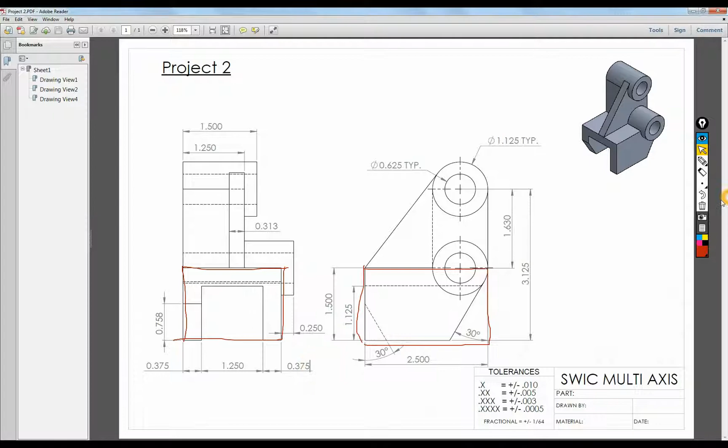We're going to go ahead and start drawing the top of this part, and the first feature I'm drawing is this guy right here. He's kind of the main feature of this whole part. Okay, so that is 2.5 inches long, and you add all three of these up, it's 2 inches wide. So let's go ahead and move over to MasterCAM and get drawing.

So start with a rectangular shape. It was 2 inches long. I'm sorry, that was 2.5 inches long. And it was 2 inches wide. And that was 1.25 plus 0.375, and there were two of them. So we'll let it do the math, and yes, it is. It's 2 inches. So I'm going to do an upper left anchor. I'm going to anchor it to the origin. Go ahead and approve that.

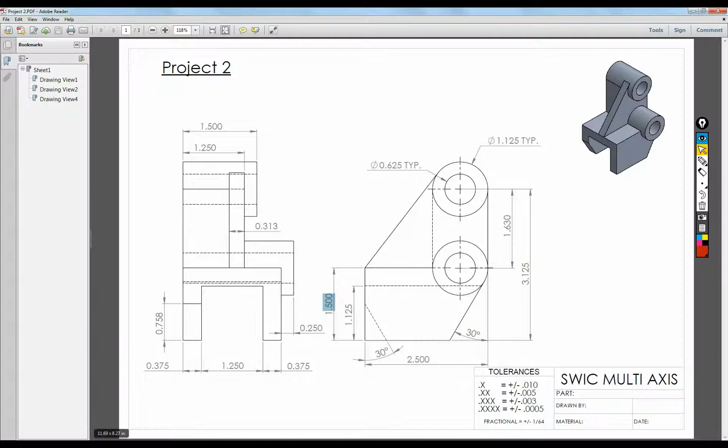So now I'm going to give myself a little perspective on this, and we're going to extrude this guy down. How far? That is this value right here, 1.5 inches. So we'll go solids, extrude, select that chain, approve it. Distance of 1.5. Let's extrude in the up position. Sometimes down's a little easier, but it really doesn't matter. Oh, there we go. So we have our first solid now, and it's just this block.

So the next feature I'm looking at making is this cut that goes straight through the part. It's this rectangular square, and it comes all the way through. The size of that is 1.25, and the height is 1.125. But we got to make sure we're drawing on this face. In order to draw on this face, we need to move to the WCS left.

Okay. Now I want to give you a little bit of heads up. What's the difference between these WCSs and these WCSs up here? These red ones have to do with how you're looking at the part. So when I click on left WCS, I'm looking at the left side of the part. When I'm looking at front WCS, I'm looking at the front side of the part. These up here, these greens, treat them as though you're looking at the machine, or a 3-axis mill. So when I click top WCS, I'm actually looking through the spindle. When I click front WCS, I'm looking through the front door.

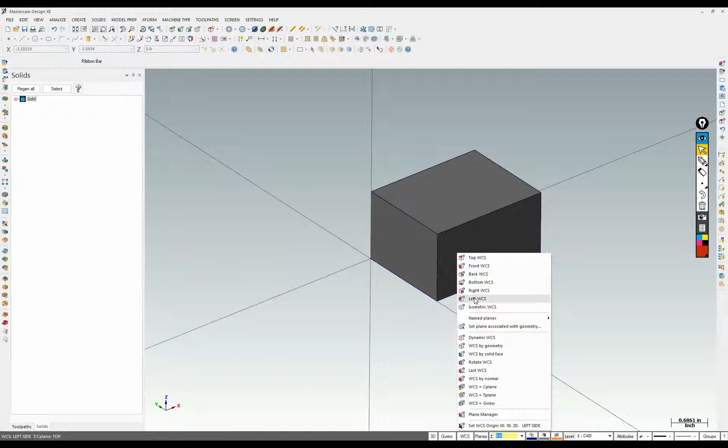So if I click left WCS over here on the part, that left WCS is going to be pointing towards the spindle. If I click bottom WCS, it means the bottom is now pointing towards the spindle. And this basically just changes the view. So in this case I click left WCS, that means this in essence is kind of pointing towards the spindle, and I'm just trying to give you an idea of how it's thinking about it. So when I click top WCS, as though I'm looking down through the spindle, I should be looking straight at that face.

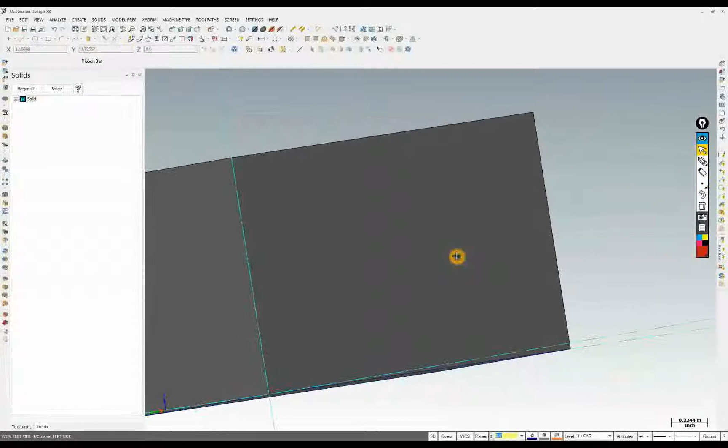Okay, so these can get very confusing sometimes, and I'm just trying to give you an idea of kind of what they're doing. In reality, that's not what's happening. It's not really setting up your machine for machining. So it doesn't relate to the actual CAM side of it. It's just sometimes how you're looking at it.

Okay, so we need to draw this rectangle here on this face, and I'm going to have some overlapping CAD here on this bottom. I don't like overlapping CAD. I'm going to create a new layer, and I'm going to call this center cut, and a new rectangular shape. The origin will be in the middle bottom, because I'm going to be snapping to that point right there.

Let's go back and get the dimensions again. It's 1 1/4 and 1.125. So it's 1.25 here, 1.125 here, center snap. Make sure these are all zeroed out.

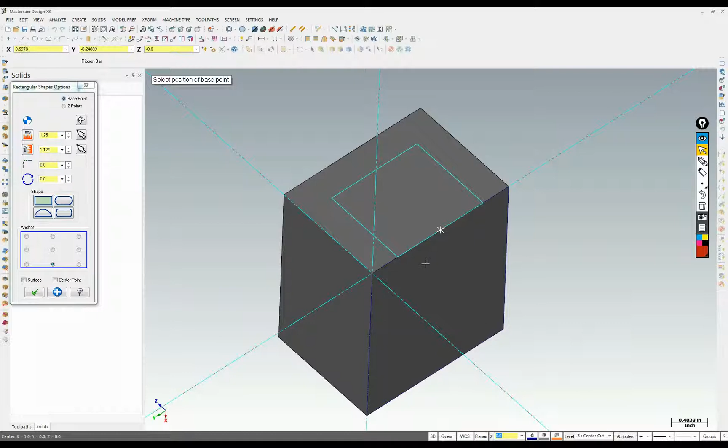We'll snap to this point here, and there we go. Now, because I created level 3, I can now turn level 1 off. Let's go and approve that here. Oh, that's okay. I've got myself in a little bit of an issue, but it's real easy to fix.

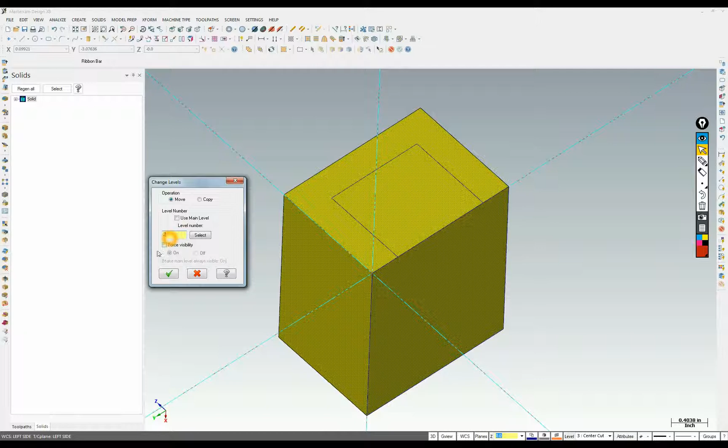Level 2 has nothing in it. Level 1 has the 4 original CAD lines and the solid in it. I want to move that solid to level 2 where it's supposed to be. So let's highlight that solid. Right click on the word level here, we'll uncheck use main level, and we will put number 2 here, and we'll approve it. Now you see you have 1 entity there, 4 entities here, and 4 entities here.

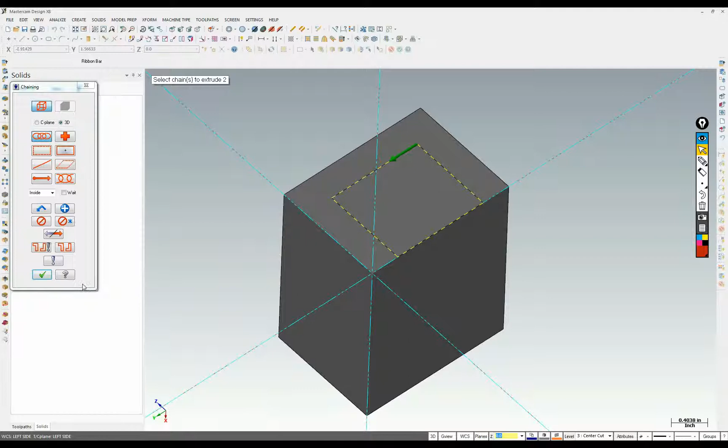So when I turn the visibility of level 1 off, just that bottom CAD. Now it's important, you don't want to delete the CAD you're using to create these solids. It messes things up. So let's go ahead and cut this CAD straight through it. So solid extrude, let that auto chain around. It's wanting to create a body initially. We want to do a cut body.

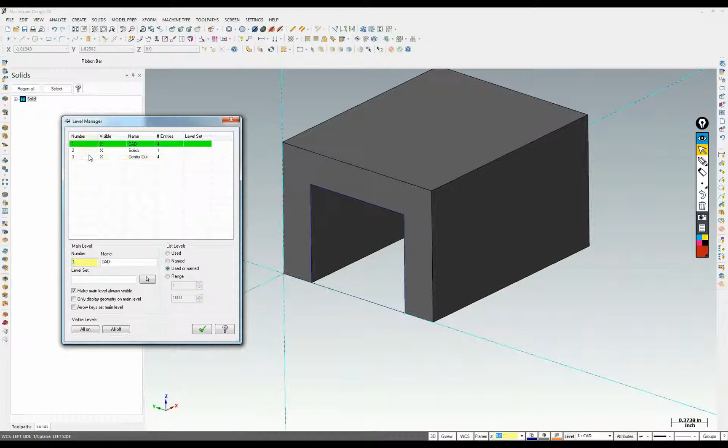We want to flip its direction because it's not actually cutting into the part. There, now it is. And instead of a distance, we want to go through all. And we'll approve that. And now you can see we got our bottom feature. So let's go back to our levels. I like to primarily draw on level 1. We'll hide the visibility of level 3.

So next part we're going to be looking at is this monolithic top, or it's basically a cube. It intersects these 2 cylinders here, and we're going to be drawing it from the top. So we're going to draw a square on the top face here and extrude it straight up. So we need to be drawing on this face. So in order to look down on that part, we need WCS top. And now we're looking straight down. To verify, I'll click this first one here. And there you go. We are looking straight down on this part.

Now, I'm going to teach you a quick lesson about 3-dimensional drawing and 2-dimensional drawing. With this in 3D, I can actually use my snaps to snap the square up here. What the 3D icon does here is it allows a Z value to be added into a snap. Let me show you real quick. So if I leave that in 2D and I want to draw a circle and I want to snap to this, what will happen is you'll see it actually get drawn down at 0, because Z of 0, 2-dimensional, even though I'm snapping to here. See, the circle's down there.

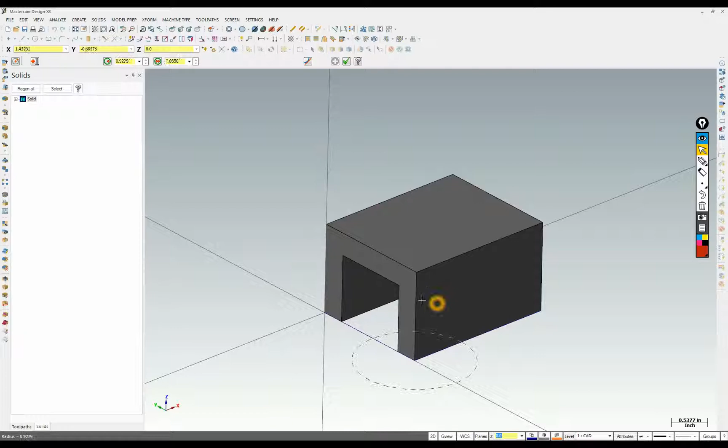Now if I really wanted to draw up here, I have 2 ways of doing it. If I have a place to snap to, I can adjust it to 3-dimensional, and I draw the circle again, and you see it now takes into consideration the Z depth here of a snap.

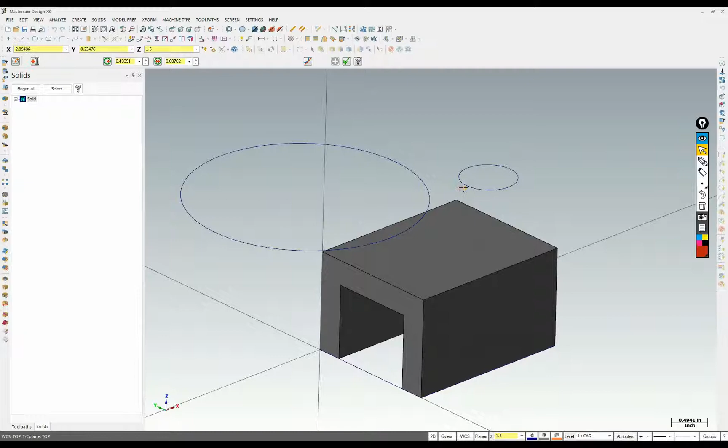Now the other way of doing it, sometimes you want to imply you want it to draw at a very specific level. So if we leave this at 2D and I change this Z level to be the top of here, we can left click on the word Z. I can either type it in, which is 1.25 I believe, or no, it's 2. Heck, I think it's 1.5. I could type 1.5 in here directly, or I can left click on Z and click on one of these snaps, and it puts it in there for me. So now whatever I draw, no matter where, as you see, it's always at that height. So those are 2 ways of how we can draw on top of this part.

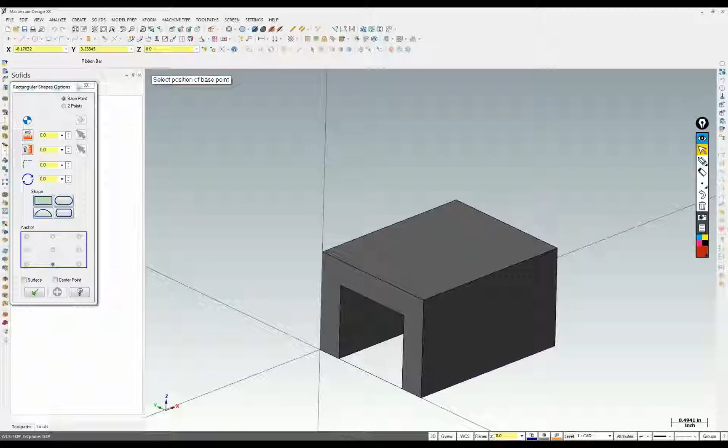I'm going to go ahead and do 3-dimensional, and I'll zero out the Z, because I'm going to use rectangular shape. Looking at this, we have a width of 1.25 and a 1.125 here also. So 1.25, we just got to make sure we know which direction we're going. So looking at the top of our part, we want the 1.125 going this way, and the 1.25 going this way. So, hold on, I got to escape out of this because it's kind of stuck. So 1.125 on that direction and 1.25 on that direction.

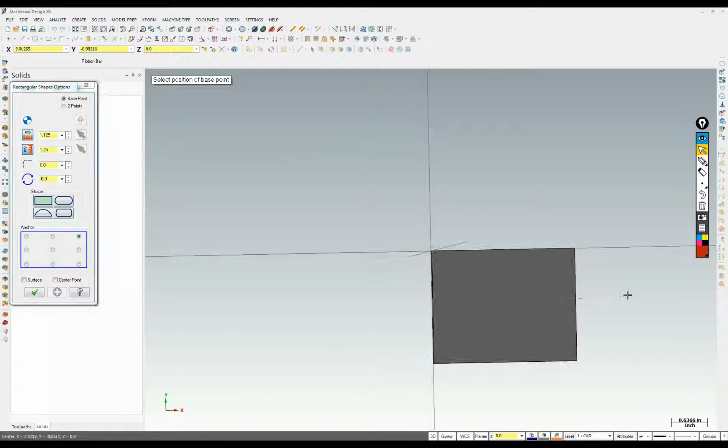We'll have an upper right snap, and I'm going to turn it a little bit because I want to make sure I'm snapping to here and not down here. So we'll snap to that corner, and so here we are. This is the square we're going to use to extrude. We're going to go ahead and approve that.

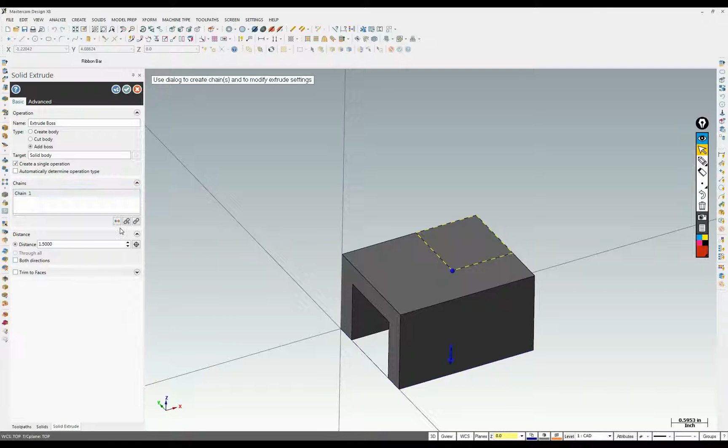Let's go solid extrude, select around that chain. It's going the wrong direction. But we're going to make sure instead of creating body or cutting body, we're going to add a boss. And adding a boss just means we're adding to an existing solid. I'm going to flip the direction around, and looking here, that value is 1.63. 1.63 here, and we'll approve it. So there we go. Now we have the square sticking out of the top.

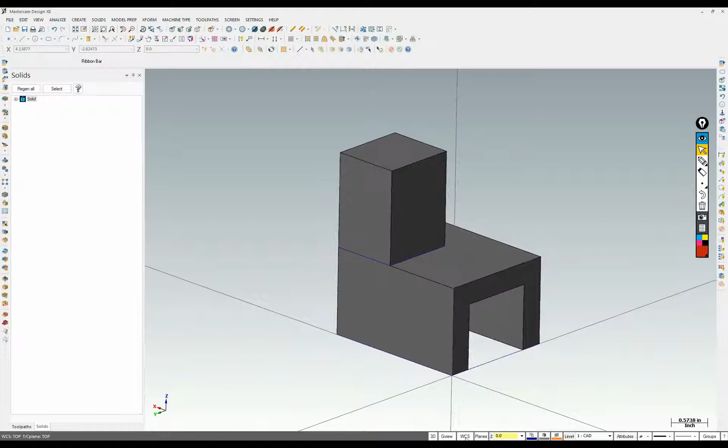Okay, so going back to Mastercam, what's good about this is we can use this cube that we draw to snap our locations of our circles, and both those circles have a diameter of 1.125. I want to be drawing on the back side of this, so I'll be going to WCS back. To verify I am looking at the back, I'll click on that top WCS, and I am.

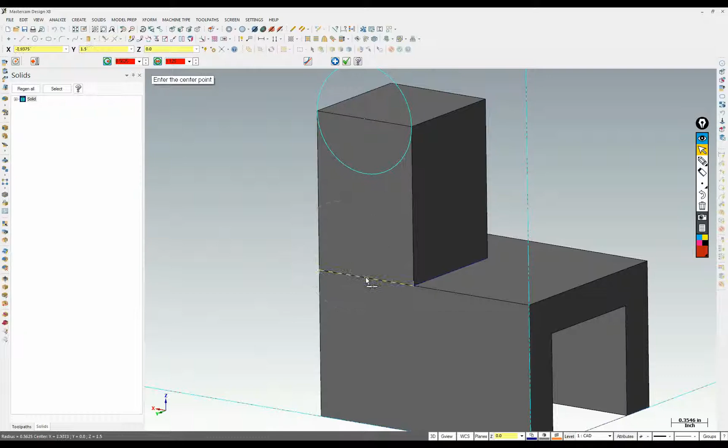We'll click circle here, and I'm going to go ahead and lock in the diameter. So now every time I click, I'll be creating 1.125 circles. Now I'm going to middle snap here, and there are two circles. So the next thing we're going to do is we're going to extrude these guys out.

So solid, extrude. I'll start with this first one here. We'll approve it. It's going the wrong direction, but we want to add the boss. We want to flip its direction, and now we want its value. We already know that this is 2 inches wide, and it's sticking out another 1/4 inch, so our value for that depth is 2.25. And there it is. That's where we need it. Approve it.

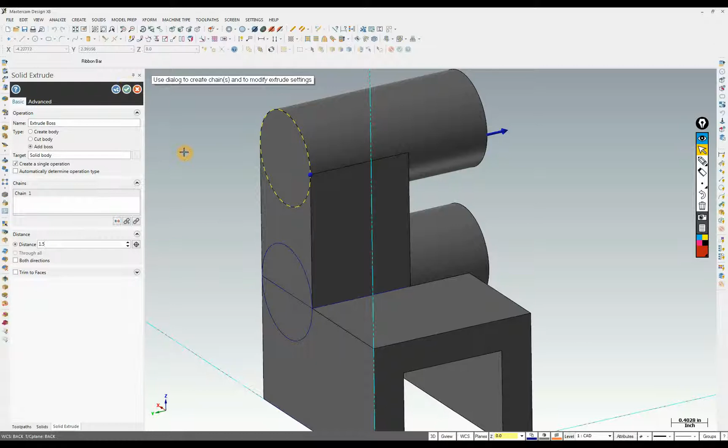Let's take a look at the other one. The other one is 1.5 inches out. So solid, extrude. Select that circle. Make sure it's add boss. It's going the right direction. 1.5. And approve it. And there we go. Now, I want to show you something: I did it in this order to deliberately cause a problem that you may run into in the future.

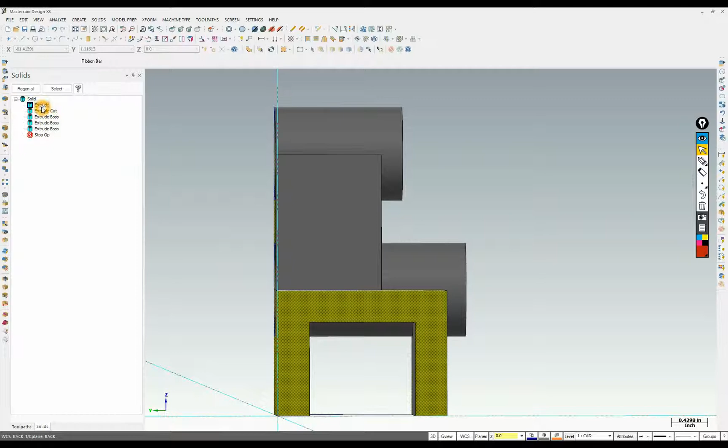Looking at the underside of this, you see that this cylinder that we created here, this extrude boss, is showing up inside this cut here, and it's not supposed to be. And that has to do with the order of processes. What the kernel is doing is going through, it says, okay, I'm doing that extrude first, and this cut, and this boss, and this boss. And because this boss was created after that cut, it's coming through that cut.

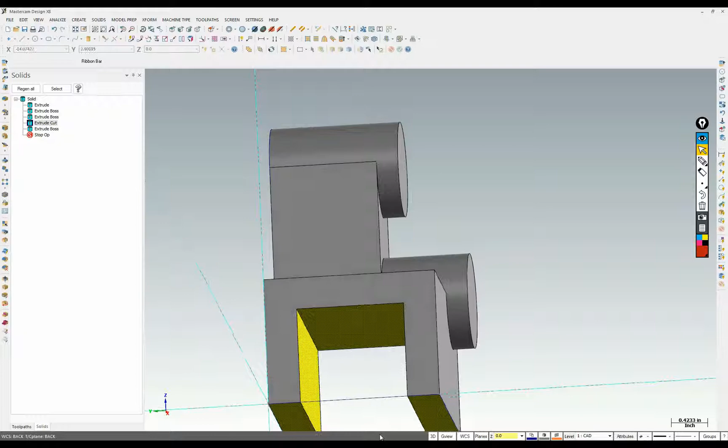Now, we really wanted the cut to be done afterwards. So we're going to simply fix that. Here's our boss that created this cylinder. We're going to take this cut here that we did, and we're just going to drag it right on top of it, put it right after that boss, and as you see, it cuts right through. And that's how you fix some of those problems.

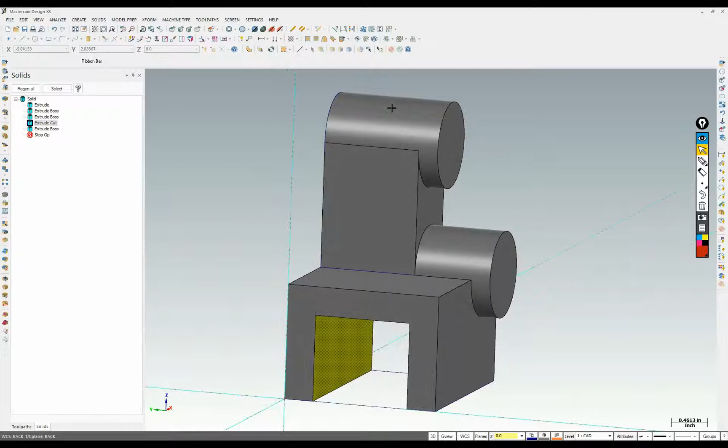Easy enough. Okay, so now let's go ahead and create the other two circles that we're going to use to cut through here. The diameter of those circles is 0.625. We are still at WCS back, and we're going to use the geometry on this front to place our circles on the back side. In order to do that, we must be in two-dimensional view and with a Z of 0.

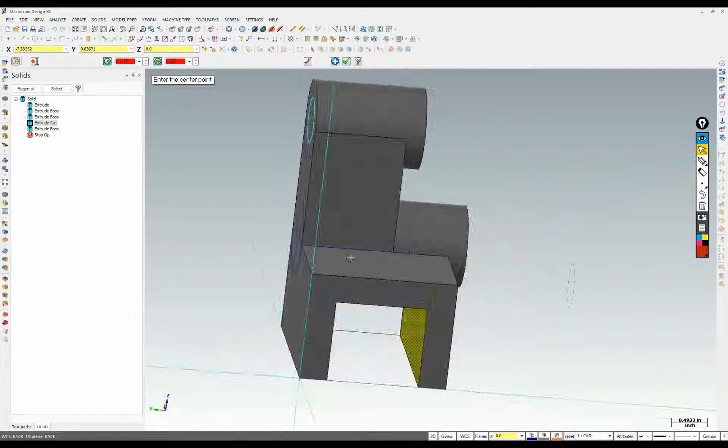So with a circle, we're going to change our value, 0.625. It looks wrong so far. It's okay, it'll snap to the right size. So when I snap to here, click, the circle's created on the back side. And that's what two-dimensional Z of 0 does, because our actual drawing surface is back here. So I'm going to snap to the center of that one, and boom, I have our second circle.

So now let's go solid extrude. We're going to select both of these this time. I'm going to go to a cut body. It's going in the right direction, and we're just going to click through all. And now we have both holes done.

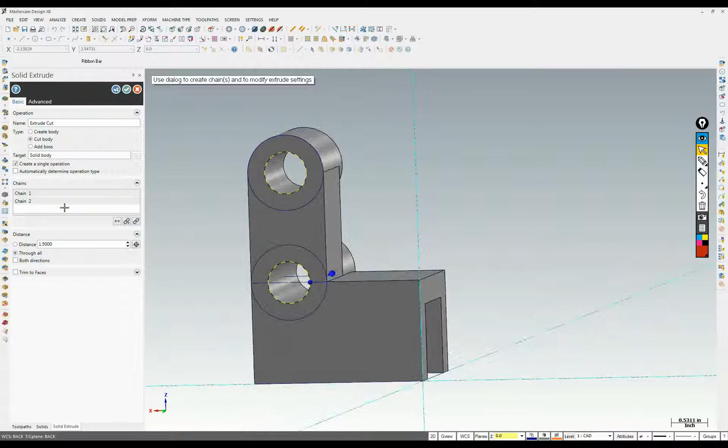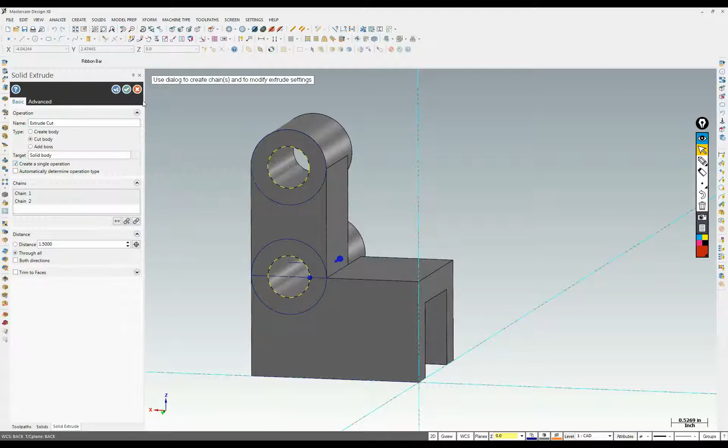Here's another thing you may want to consider too. This information here: create a single operation, or not. If I uncheck this, this will be two separate features in the solid tree. But by leaving it as one, it shows up as one solid feature in the tree. So I'm going to leave it create a single operation. And see, now that extrude cut is both holes. Let me see if I can get in there and change it. Nope, once it's set, it's set.

Okay, so next up we're going to draw this rib that comes down. It's this triangular shape coming off the side here. I'm going to be drawing this in front view. So WCS front, click on that again. Yep, we're looking at the right face, and I want to be drawing on this level, and I want to be drawing in 2 dimensions.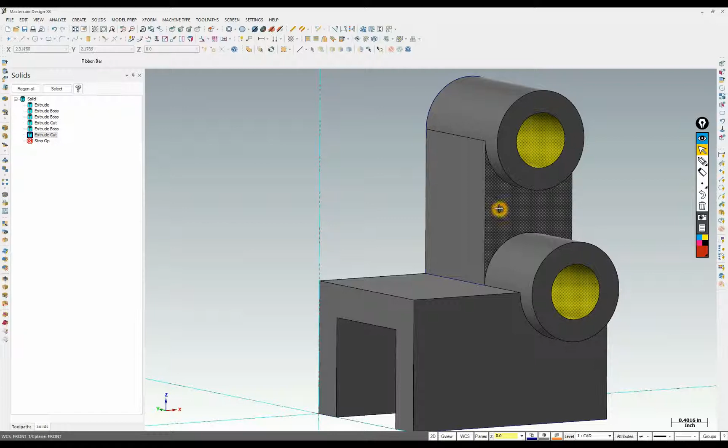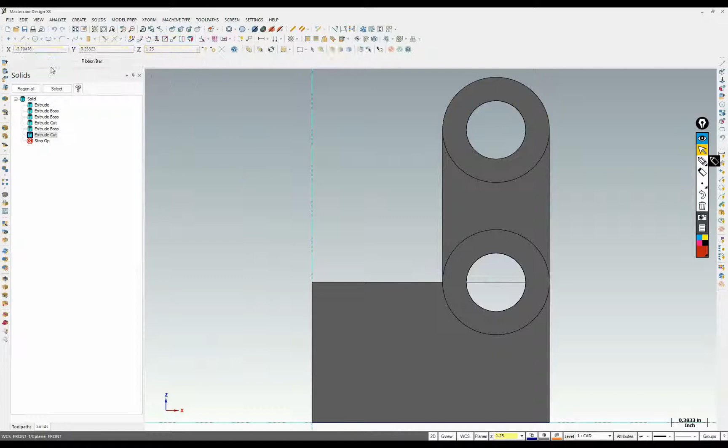So I'm going to left click on Z. I'm going to snap to anything on that plane. There we go. So we got a Z of 1.25, which is perfect. So let's get in front view here. And we'll need a line that's going to snap from this endpoint. Didn't draw it. Let's try this again. It goes from this endpoint.

Okay, it's just disappearing on me. We need it to snap to a tangency right there. Now that's tangent to that circle.

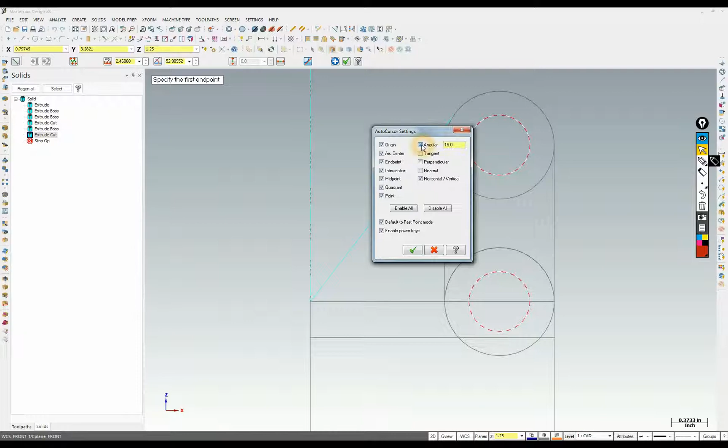Now I need to draw in the rest of the stuff. In order to see what I'm doing, I'm going to switch to wireframe mode, that's this icon right here. I'm going to right click and click on my auto cursors, and activate angular at 90 degrees. That means every line I draw will either be drawn at 0, 90, 180, or 270 degrees. So I'm going to draw a line, let's turn off all our auto cursors. I only want endpoint, so I'm going to disable all and do endpoint. And that's from here.

Oh wait, I disabled the other auto cursor I need. Now I want angular too. So we want from here, we want from here, and we're going to let them overlap a little bit.

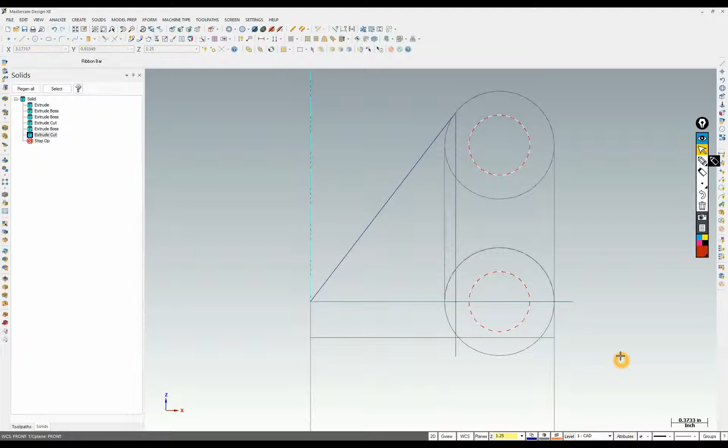Okay, so as I turn the view now, I've got this set of CAD right here, and I got to trim them back. They're also overlapping this square, which I don't like. So I'm going to create a new level, 4, and we'll call this rib. I'm going to select these 3 CADs and move them to level 4.

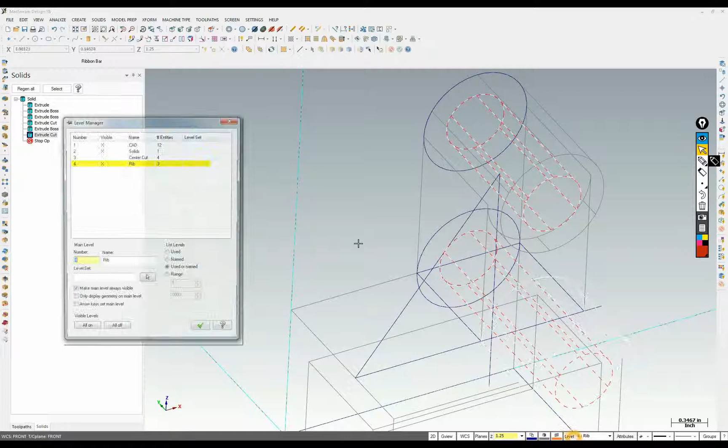Turn the visibility of level 1 off, and now I have - sorry, that's the wrong button. I was wanting to push clear colors. Okay, so now there's the triangle, but I got to make these endpoints match, so we're going to trim them back.

So I'm going to use the trim icon here. We're going to divide, delete, and now we have it trimmed back.

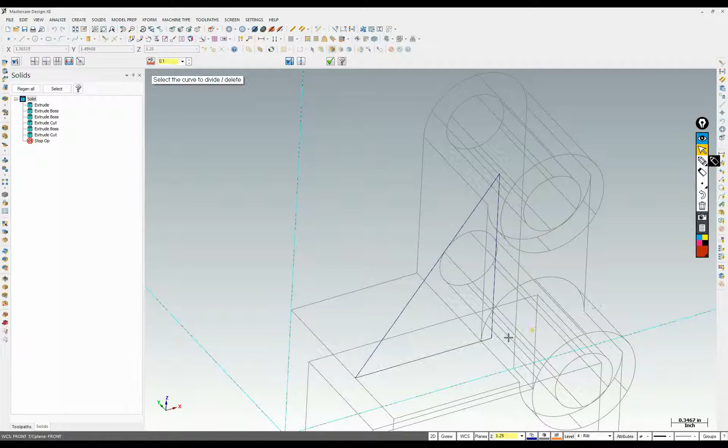Now somebody may be asking, why are we drawing this extra amount here? How come we're not following the circle and coming down straight? The reason is I'm going to add a boss, and this section that is intersecting the part is going to be absorbed. So you see how it's going into the part? I'm not worried about it because it'll be absorbed into the part.

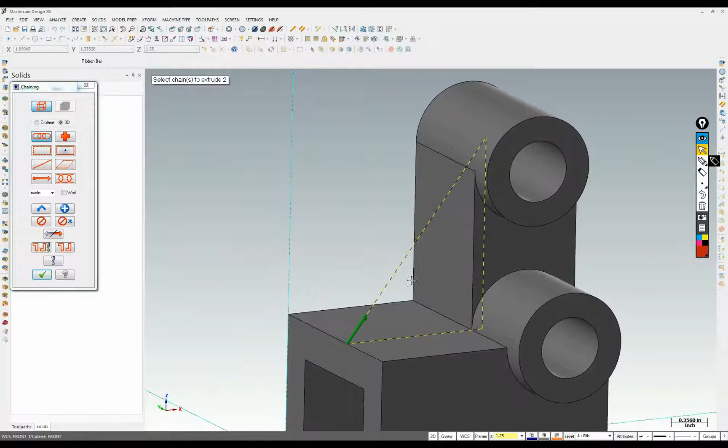So let's go solid, extrude. Check that, and that chain goes all the way around. It's going in the right direction, but we want to make sure it's an add boss, not a create body. The value of the depth is 0.313.

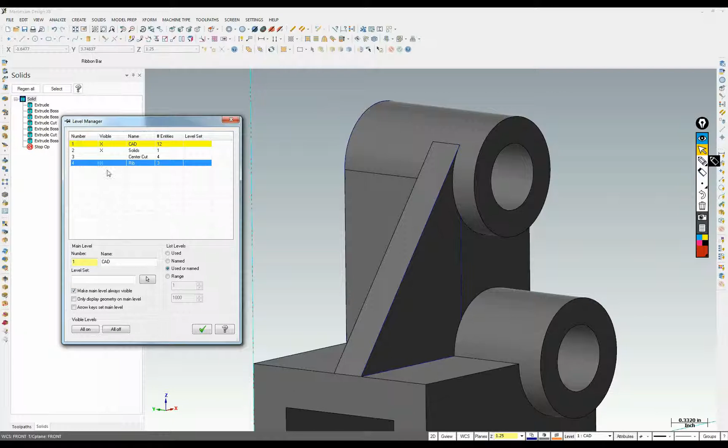We'll prove it, and as you see, everything has been absorbed into the part, which is perfect. It's what we need. So I'm going to come back, activate layer 1, and turn off the visibility of layer 4.

So what's left to do? Well, we have a wedge cut on this back leg here, and then we have a wedge cut that goes through both of these legs on this side. We're going to go ahead and do this wedge cut over here, and I'm going to create another layer. We'll call it large wedge cut.

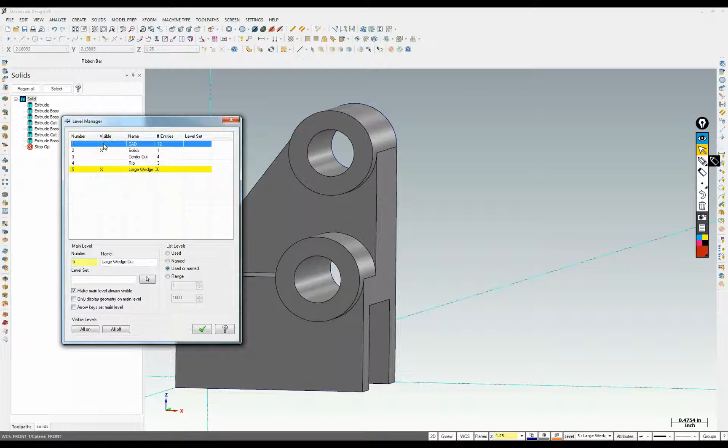And then I'm going to turn visibility of layer 1 off. Make sure layer 5 is active. This is probably the hardest part you got to do on this. We're going to snap our 2-dimensional drawing, our Z level, to here.

Now, looking at this part, you see that all we have basically is an angle line at 30 degrees, and it comes tangent to the circle. That's all we're given, and that's all we need to actually create this part.

But there's actually 4 segments that we got to draw. We got to draw this angled segment. There's a segment that comes out to here. Let me draw - so we got this segment that comes through here, a segment that comes up here, and then there's a small arc segment right in here. These 3 segments here we can just pull from our existing part. This one we have to create.

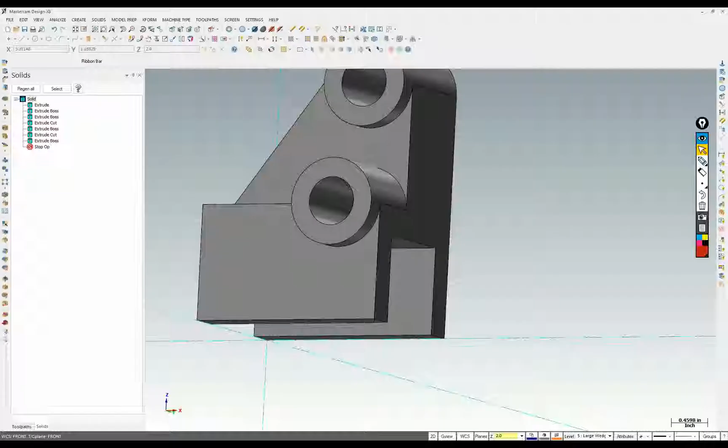So let's switch back over. Now to duplicate these edges, we'll go create curve on one edge. We're going to select that edge, and that edge, and we'll hit enter. Now you see we got nice 3 new pieces of CAD.

Now we got to draw a line that comes tangent off of this arc, and it's at 30 degrees off of that arc. So looking at this, 0 degrees for Mastercam.

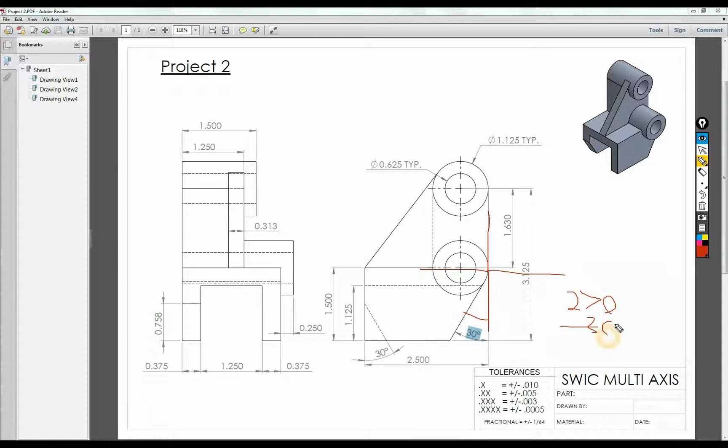Is at 3 o'clock. So that would be 0, that would be 90, this is 180, this is 270. So we're 30 degrees from 270. So 270 minus 30, sorry for the math here, is 240. So that is the angle, even though it says 30, we're actually coming off at 240 degrees. So in here, for this angle, reset again, this angle we're going to put 240. I'm going to lock it in too.

This controls tangency, this controls the angle. Snap here, and we're going to come off this line right here, and as you see, it's fixed at the angle. We just draw past, just like we need it to.

Now we have all our CAD the way we need. Let's come back and trim it up. So I'm going to click this, divide, delete. We're going to do that part, that part, that part.

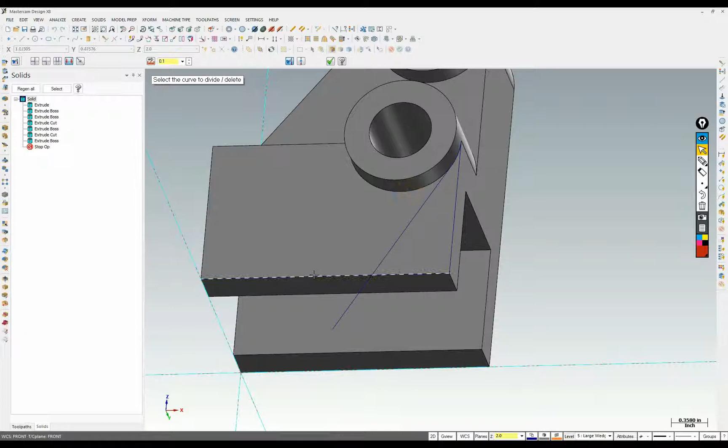Now we have our complete chain coming around that we're going to use to extrude cut. So solid extrude, make sure it auto chains around. Now this may be a problem. See how I got red and green here? They're overlapping. This may not extrude right, so I may have to correct this chain somehow.

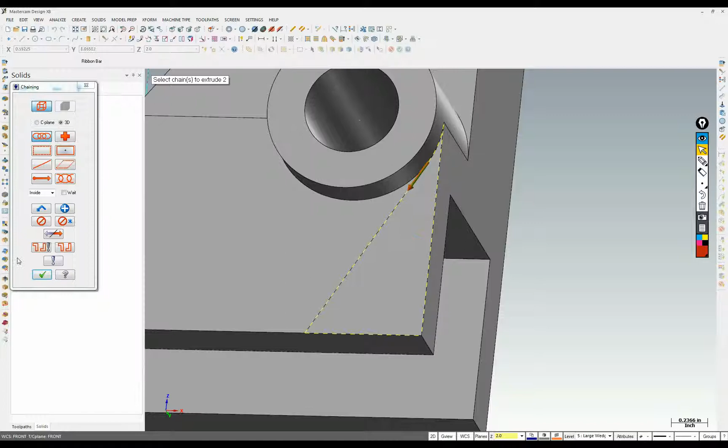Let's go ahead and see what it does. Yeah, see, I got this red going this way and this green going this way. Something going on here. I'll show you what it does, but it's basically not going to work. Kernel solid error. So I'm going to come in here and delete this arc.

In order to get this arc, priorities are to solids. I can't select the chain over the solid. I've got to set select only, hit wireframe, and select only is this icon right here. Wireframe, approve that. I'm going to come in here and select that guy and delete him.

And create a new curve on one edge. I'm going to redraw this, and come back in and do trim one entity. Now it's going to say select the entity to be trimmed or extended.

Well, I'm going to select this guy here, and then I'm going to tell it to trim to this line here. And let's see if that worked. Nope.

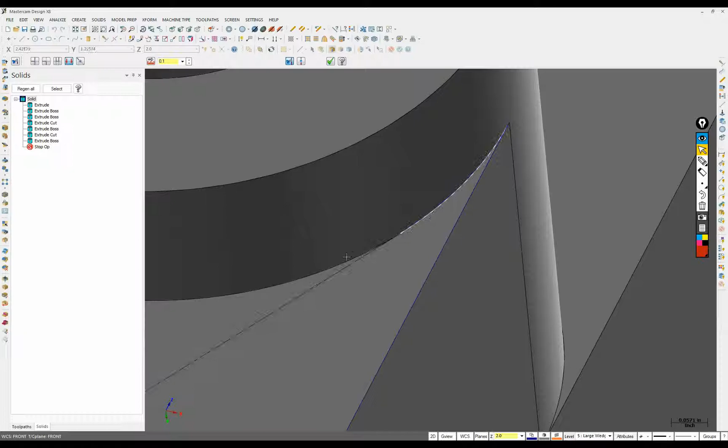Okay, so that one's not working too well for me. So let's try this one again. Okay, so now I trim, divide, delete. And it looks like it's looking better.

Let's go ahead and try the chain select, select your extrude, and boom, see? Only a green, none of that red. So that's what's happening. If you ever run into that where you have a red and green arrow, that means your chain is not connecting.

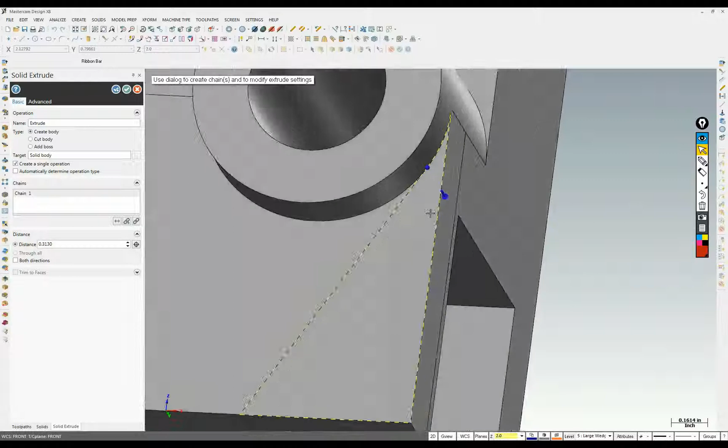As you see, it now knows what to do with it. So let's go with the cut body, and we'll go through all. Voila, there it is. So let's come back to level 1.

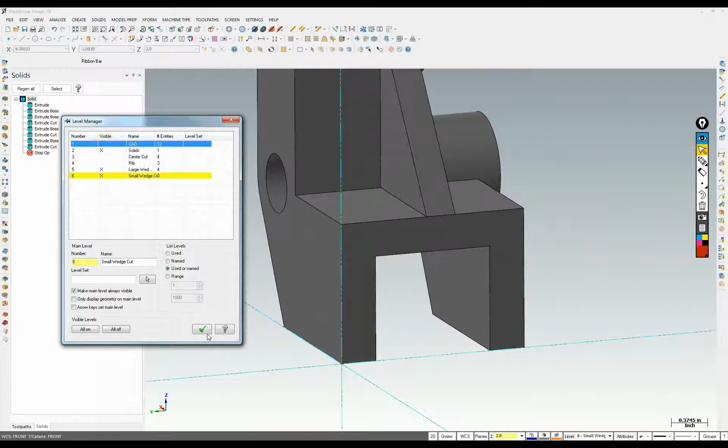We're going to be drawing another triangle back here. We'll have some intersecting stuff, so I'm going to create a new level again. Small wedge cut. Turn visibility of level 1 off. And we're going to draw back here.

Now, what side of the part is this? This is WCS back. And we got to make sure we're drawing on this plane here. So we got to just reset our Z to here, which happens to be 0.

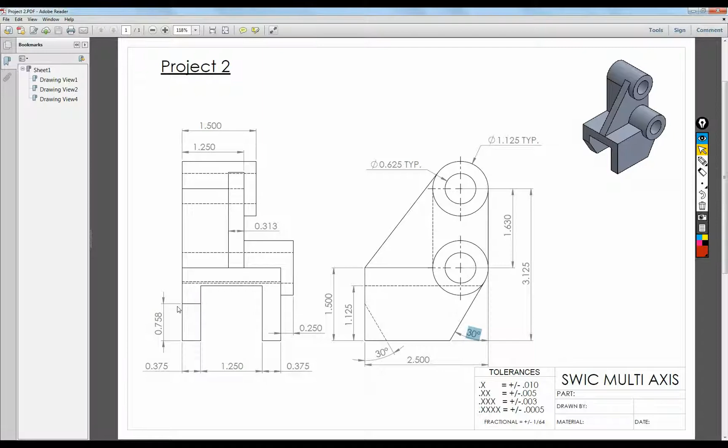So let's go create curve on one edge, here and here. That's all we need for now, because if you see, we got this diagonal cut. It's right here. This little leg has been trimmed off, and it's only on one of them. And this angle here is 0.758.

Now we duplicated this edge and this edge. Now I got to offset it 0.758. Let's go X form, offset, select that line, snap up here, take 0.758. It didn't look like it's quite right, so I'm going to do it again. This direction, 0.758, yeah, that looks better.

Okay, so now we got to do another line. But remember, we should already have our angle set. It's 240 — we're looking at the back. Now, if we were looking at the front, it'd be 30 degrees past 180. But we're looking at the back, so it's still 240 degrees.

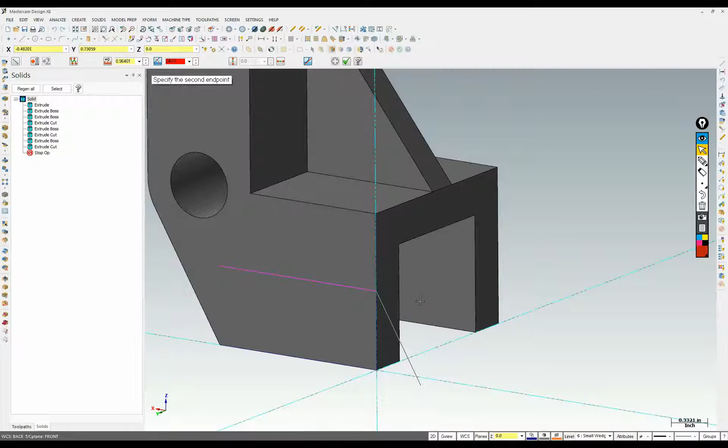So select there. Oh, no, it's not — see, it's going the wrong way. So let's see what 0 is.

Okay, 0 is actually at, let's see, it should be on the back WCS. I may not have been on back WCS. That's more than likely what the problem was. Yep, I was still on front WCS, so my 0 degree was off towards my 9 o'clock.

So now I can come back in here and put 240 back in. Select there, and now it's going in the right direction.

So let's come through and we'll divide delete. We can use divide delete to get rid of that entire line. We got to snap that one back, snap that one back, snap that one back. We should have just these 3 pieces of triangle now.

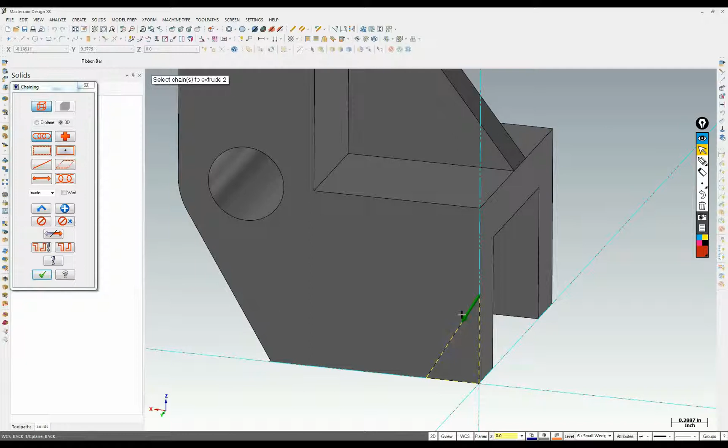So solid extrude, chain around. We're going to be doing a cut body again, and instead of putting a distance, we're going to use this auto cursor, and we're going to snap right to this point. And there it is. It cuts just that leg off.

So come here, make level 2 active, turn visibility of all my CAD off, and there is our final part. If you have any questions, don't hesitate to ask.